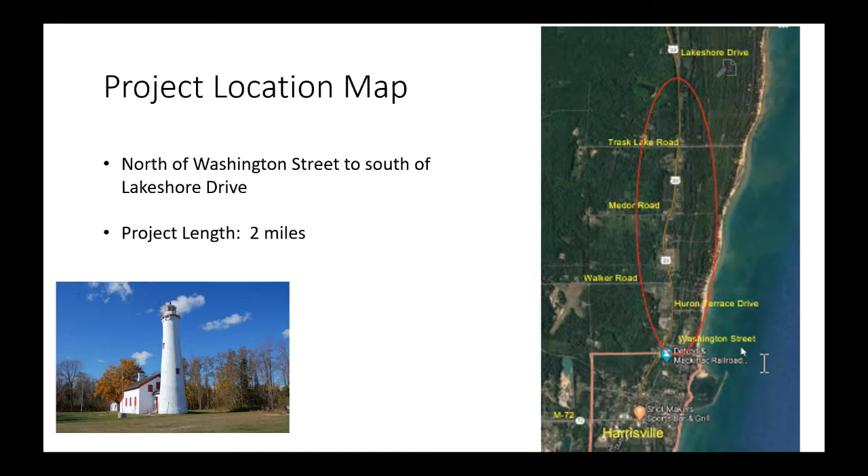So what will we be doing out there? What project improvements are happening? First of all, this is a large project. It's total removal and reconstruction of US 23 from south of Washington Street to south of Lakeshore Drive. This project will include removal of existing underlying subbase, the material under the road, aggregate base, and asphalt paving. Also included is what we call rubbleized concrete, which would be the aggregate base.

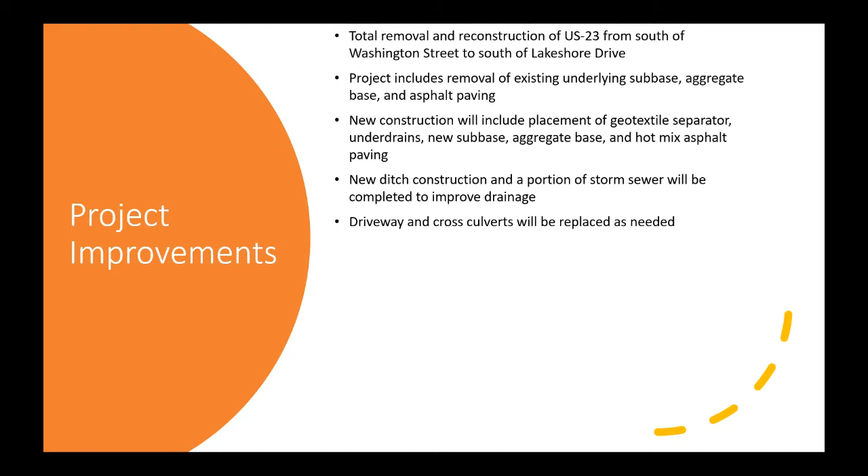Driveway and cross culverts will be replaced as needed, and many adjacent roadway approaches and commercial driveways will be reconstructed with new pavement and new curb and gutter. Residential driveways impacted will be replaced with existing material. So if you currently have an aggregate or gravel driveway and you're impacted by the project, you will receive an aggregate driveway back. But in addition, all driveways will have a minimum asphalt approach added, about 10 feet long, to reduce gravel coming onto the roadway shoulder from each driveway.

Most paved shoulder out there will be wider than it is existing now, and corrugations added to improve safety. I'm sure many of you are aware that on highways now there are shoulder corrugations placed in areas with speeds greater than 55 miles per hour to improve safety, keep people in their lanes, and stop them from going off onto the shoulder.

So this project investment in Alcona County is roughly $5 million.

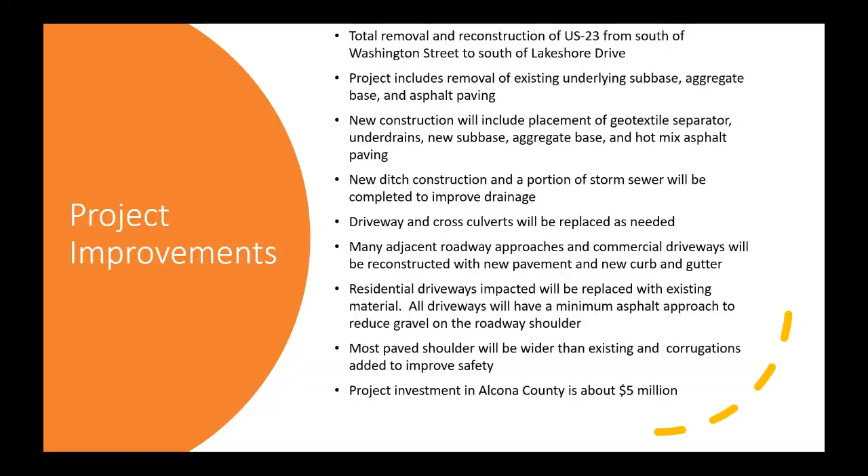First, I wanted to discuss the existing condition of the pavement. This is the reason the reconstruction project is required. The original 20-foot concrete pavement was completed in the 1930s. Over the years, the area beyond the concrete was widened and paved with asphalt. In 1995, the last major rehabilitation project was completed by removing the asphalt and rubbleizing the concrete below.

Basically what that means is they crushed the concrete to try to create somewhat of a gravel surface so the reflective cracking wasn't coming through. Upon that, they then repaved on top of it. This project did improve the ride of the pavement for many years. It has lasted 20-plus years, which is a good expectation, but it did not remove the underlying problem, which is the poor draining soils that were underneath the concrete.

These wet soils have caused freeze-thaw ride issues over the years. You will see from these photos that the pavement is ready for a total reconstruction. On this current slide, you can see quite a bit of the cracking that's going on, and this is kind of what the whole pavement looks like in the 2-mile stretch.

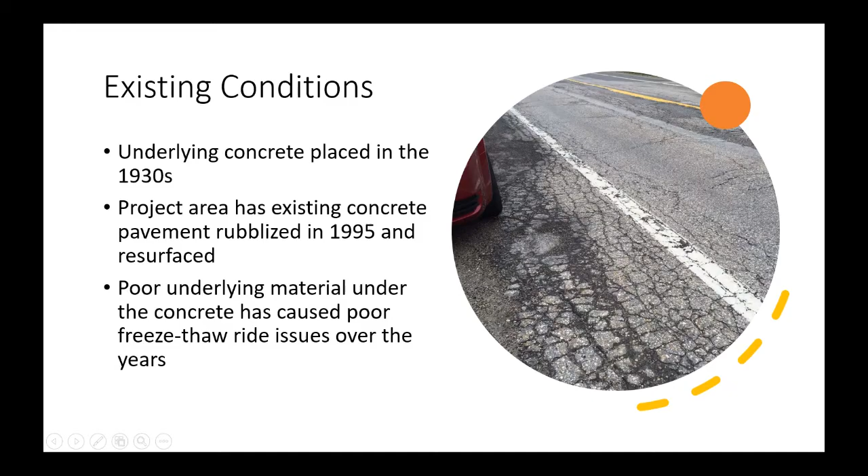This next slide just gives you some more visuals. Obviously, if you live in this area, you're well aware of it. This is the Huron Terrace Drive intersection, where much of the cracking is occurring, and the close-up gives you a good view of really what's happening out there with the pavement.

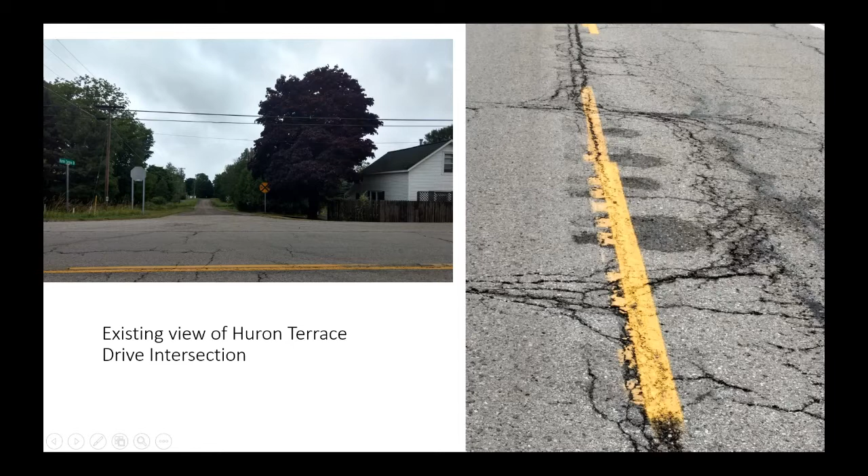So to fix this underlying soils issue causing the freeze-thaw ride quality issues, MDOT has proposed an innovative solution that can be seen in this proposed typical cross-section. Since the existing poor soils are retaining water, MDOT will be removing the existing pavement and excavating down approximately 2 feet, placing a geotextile separator fabric between the poor soils and the newly placed subbase.

So on this bottom line, it says geotextile separator. That's the portion I'm talking about right now, and that's going to basically form the barrier between the existing material and the new subbase on top.

Under drains will be added and new ditches constructed to channel water from under this pavement. So in this typical, you will see the new subbase basically drains out to the new ditch line, and these under drains eventually drain out to the ditch line as well, which should remove any water under the roadway, which, like I spoke earlier, was the cause of the freeze-thaw ride issues.

So above the subbase, a new 6-inch aggregate base will be placed along with 6.5 inches of new hot mix asphalt. As shown, the driving lanes will continue to be 12 feet wide, and there'll be a minimum 6-foot paved shoulder with the shoulder corrugations we spoke about earlier.

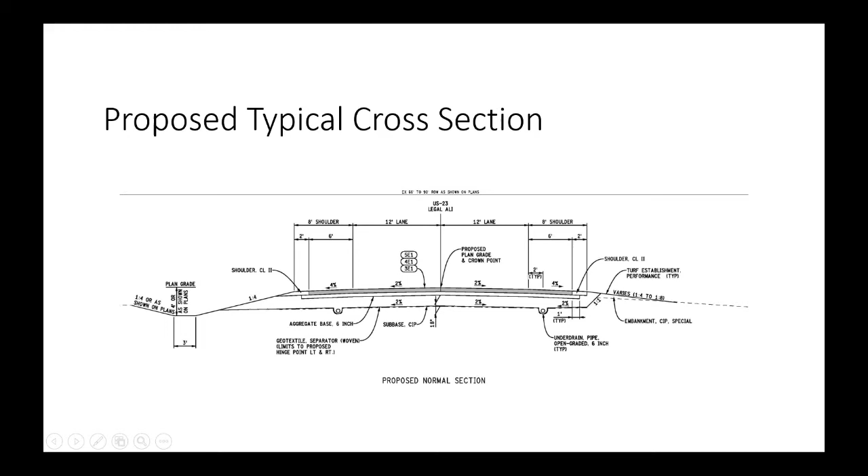Along the west side of US 23, basically from Washington Street north, just beyond Northeast Window and Door, curb will be placed to direct water to designated outlet locations. This typical describes how this will be done. You can see the shoulder will widen to 12 feet. New curb will be placed, along with an under-drain to drain the subbase of the roadway, and at various points there will be cuts in the curb that have outlets.

As you approach Washington Street, there will be inlets that take water down the Washington Street outlet. Roadway approaches at Washington Street, Walker Road, and Medor Road will receive concrete curb and gutter along with asphalt paving. All other roadway approaches will just receive asphalt due to their low volumes. As a side note, all commercial businesses within the project area will have curb and gutter approaches to direct customers to their businesses.

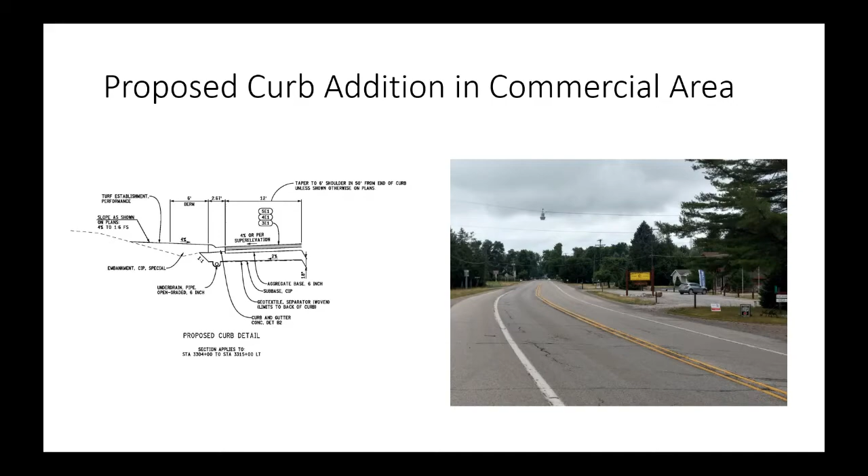Project property impacts: most work will be completed within the typical 100-foot MDOT right-of-way. To improve the project roadway and cross drainage, some property owners have been contacted for small property purchases or grading permits. Driveway closures have been requested on some limited-use driveways, and permits to grade drives have been requested to retain or improve driveway slopes on some properties. All folks impacted should have already been contacted by MDOT real estate staff, and it's my understanding most acquisitions have been completed. If you've received a request for one of these items and want more information on what will be done across your property, please contact me. My information will be presented at the end of the presentation.

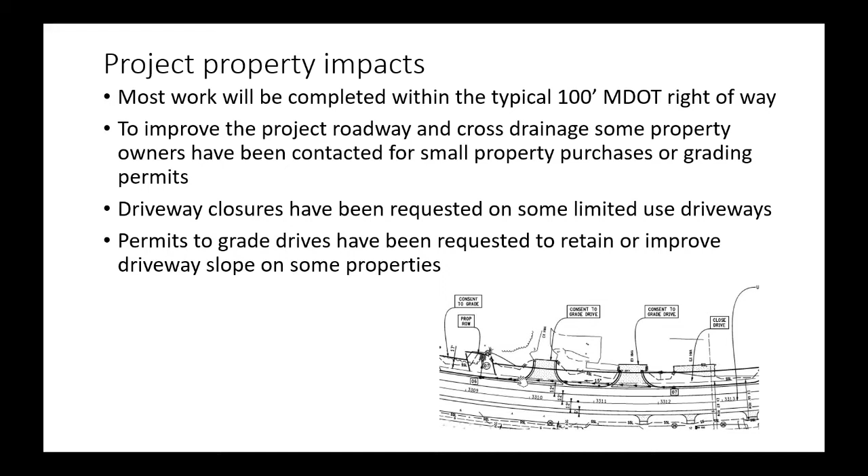Proposed maintaining of traffic: due to the extent of the underground work and the placement of geotextile fabric, a detour is proposed for this project. US 23 through traffic will be detoured for the major time frame of the project. Northbound through traffic on US 23 will take M72 west out of Harrisville to Barlow Road, staying on Barlow Road, which becomes F41, directly to US 23. Southbound through traffic will take the reverse route. There will be additional slides to describe this better.

Traffic moving to residential and commercial locations within the project limits will have two-way traffic maintained on a gravel surface. MDOT and its contractor will keep local traffic moving throughout the work area to local businesses during the duration of the project. A detail showing this will also follow.

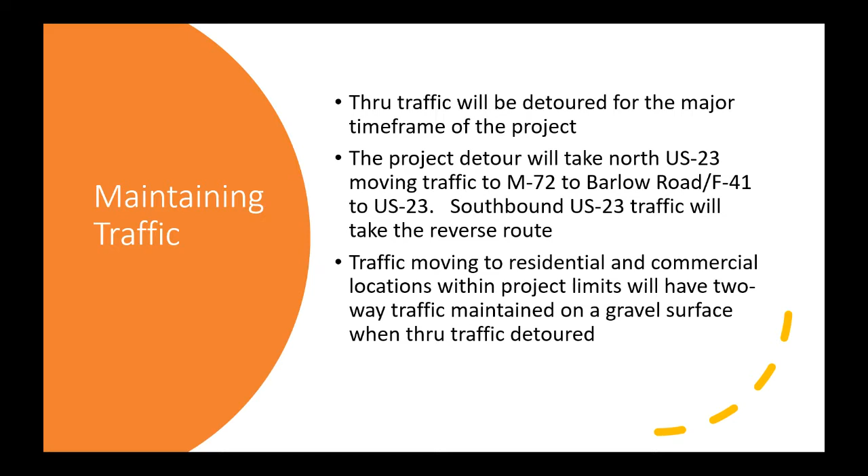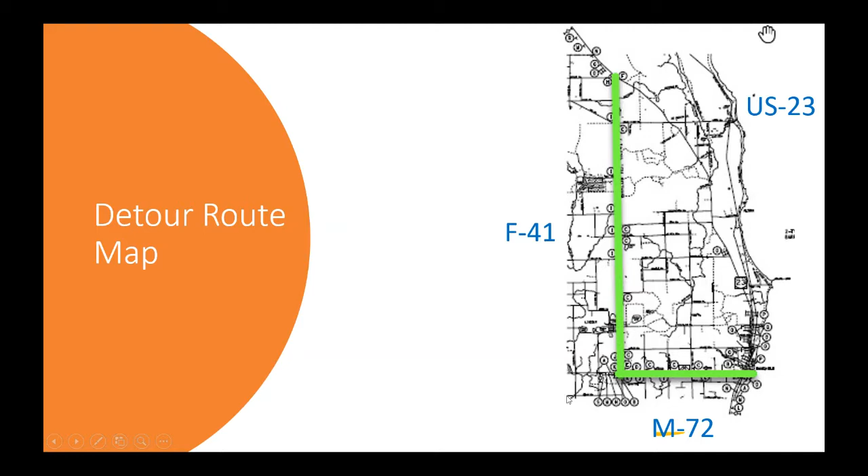The following slides give a visual of the detour route coming from the south to the north. This current slide is basically a little west of the US 23 and M72 intersection in downtown Harrisville at the light. Traffic coming from the south, going north, making a through movement heading to Alpena, would take the detour west on M72 just going out of Harrisville, as depicted in this slide.

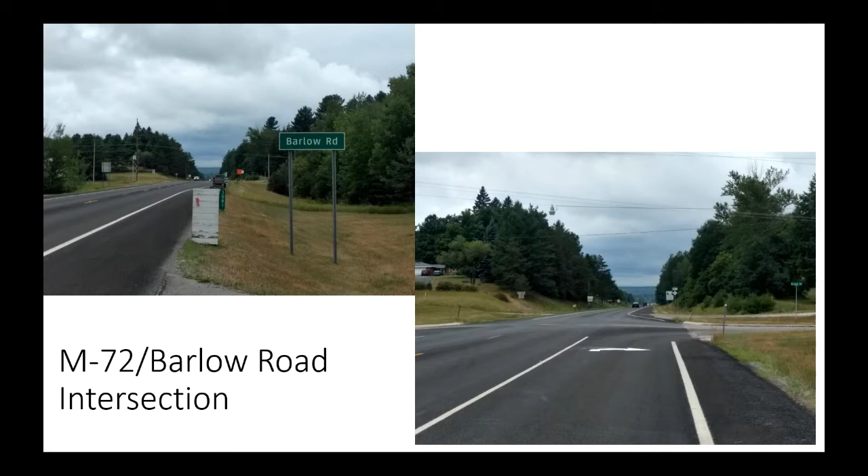After leaving Harrisville, you continue to the M72 and Barlow Road intersection. At this intersection there is already a right turn lane, which will help with the turning movements during the detour. Traffic will then turn right.

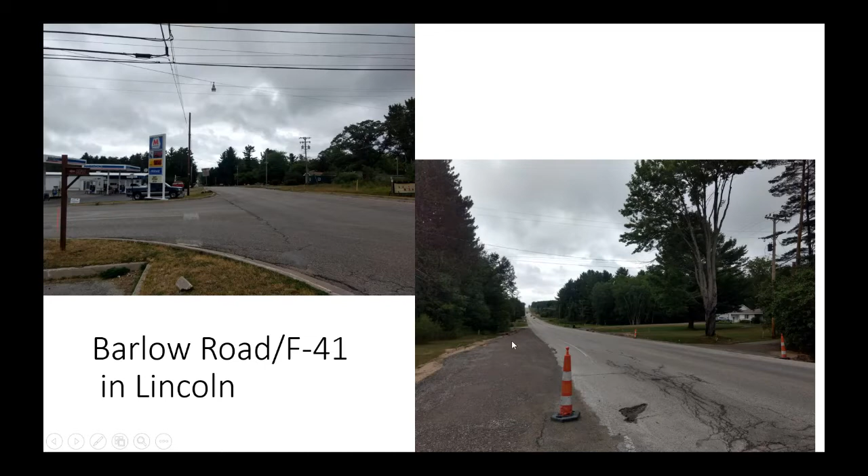The detour will continue on F41 and end at US 23, just south of the north Alcona County line. It ties into the current passing lane section on US 23 near the Citgo station, an area I commonly refer to as the Chippewa Point area.

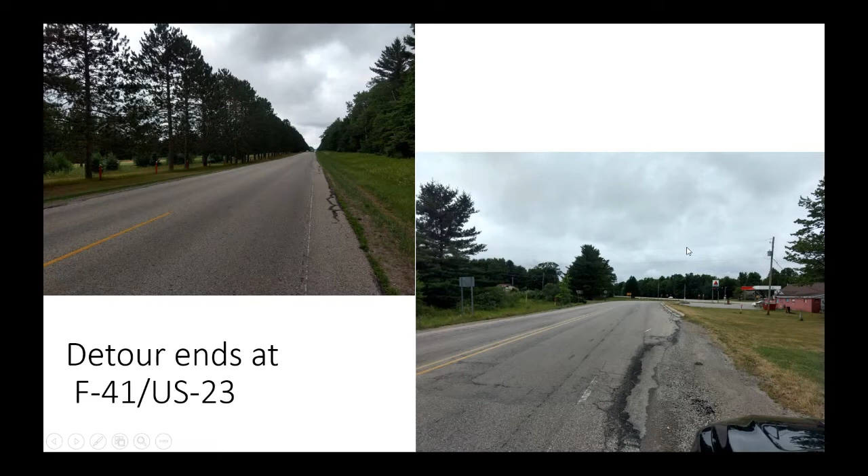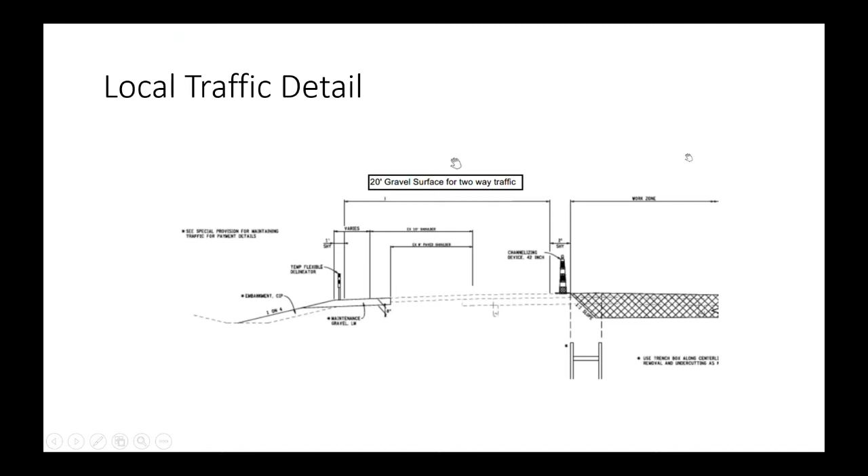Partnering: MDOT and the Alcona County Road Commission have partnered to reduce the construction timeframe impact on the community. Alcona County has received state funds to chip seal and fog seal F41 prior to the detour. This improvement will benefit a road commission overlay project in the near future. The Village of Lincoln has also partnered with MDOT on the route through their jurisdiction.

Tentative project schedule: as stated earlier, the Alcona County Road Commission will complete the chip and fog seal project on F41 prior to the detour. As part of environmental requirements, tree clearing will be completed before April 1st within the construction zone, done using shoulder and/or lane closures as required.

The major part of the project will tentatively start in April with the full detour in place. The project area would be required to be open to traffic by the July 4th holiday weekend, with final project work completed under traffic by August 1st. It was intended to start early and have the detour off by the 4th of July, since much of the tourist season is July and August in our area.

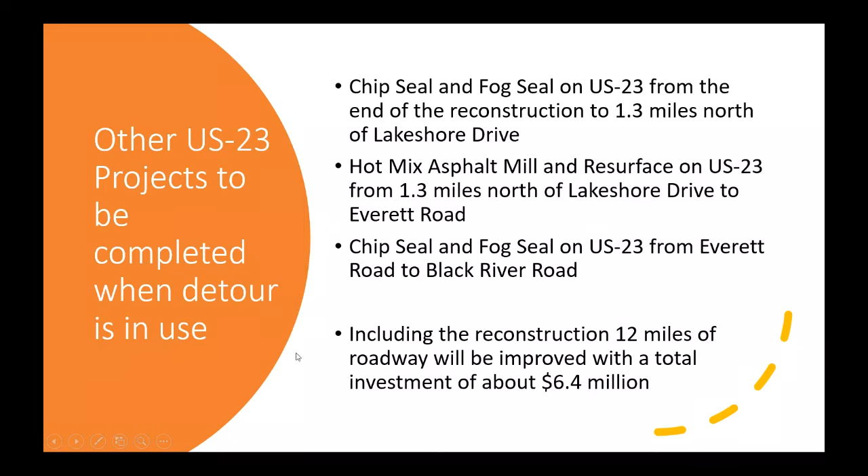In 2020, MDOT already completed 17 miles of chip seal and fog seal on M72, as I spoke about earlier, and is getting ready to complete another 4-mile capital preventive maintenance project - a short duration microsurface project on US 23 from Greenbush to just south of Harrisville next month. So in total, MDOT will have upgraded almost 33 miles of M72 and US 23 in Alcona County by the end of 2021.

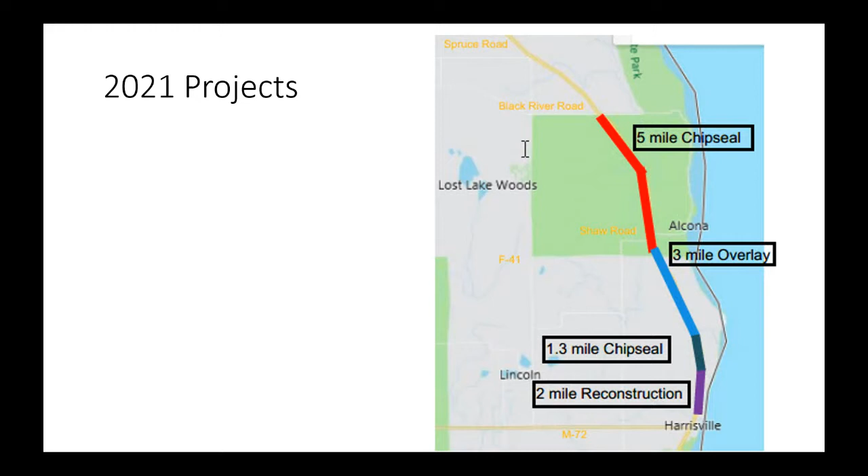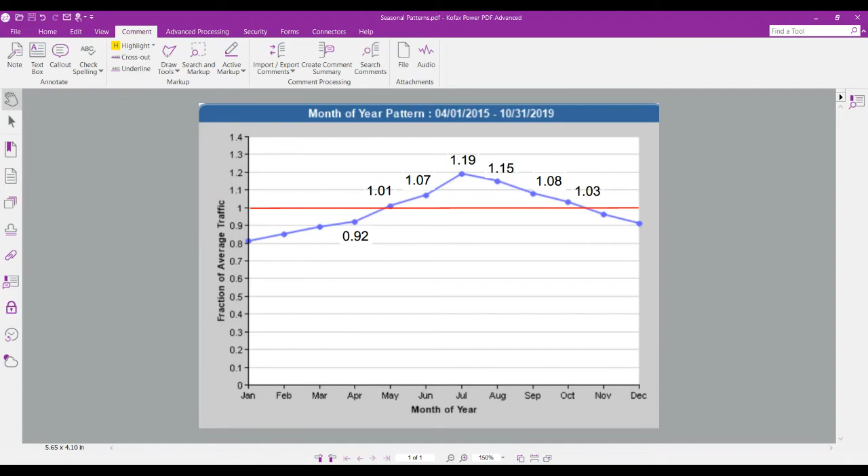I'll also say that if folks have further questions or would like more information regarding traffic data, we have this broken down by day of week. We have actual data for 10 years back. So if any business, resident, or anyone is curious about more traffic information, please contact us and we can look that up and share it with you. It's certainly public data.

Okay Garrett, next question is from Jonathan Cade again from Black River: I'm skeptical that this is needed right now because I've driven over this stretch many times this year and can't say I noticed anything amiss. I've seen so much worse all over the state. I believe you addressed that—is there anything else you'd like to add?

I don't doubt that there are probably worse roads around the state in worse condition, but this is all part of it. This project isn't directly tied to the Governor's Rebuild Michigan plan, but it's certainly related in that we don't want a road such as US 23, which is very important for the area, to get into such a condition that it's almost undrivable, or folks are having damage claims because of potholes. We feel it's very ready for a full reconstruction.

And as Kevin indicated, the old concrete there has been in place for almost 90 years, so we definitely got our use out of that concrete, and it's time to move on and get a nice new road in there. If you look at Kevin's timeline, once we do this project, you're probably not likely to see us again for a total reconstruction for 40 or 50 years. So, 2.5 months to get by for 40 or 50 years—I think that's a pretty good deal.